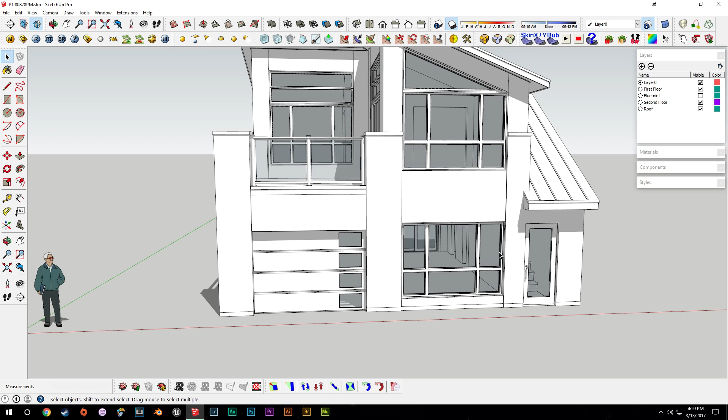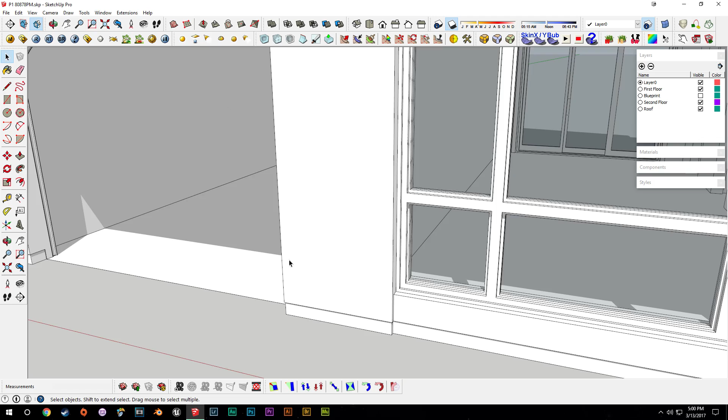But before we do that, we're going to try and add a little bit of thickness to the floor. If we just hide the garage door here, it doesn't really make a whole lot of sense for it to be paper thin essentially, especially for sort of a concrete lip. There's usually some sort of height going on in the garage concrete slab, and even into the floor area a little bit into the main room.

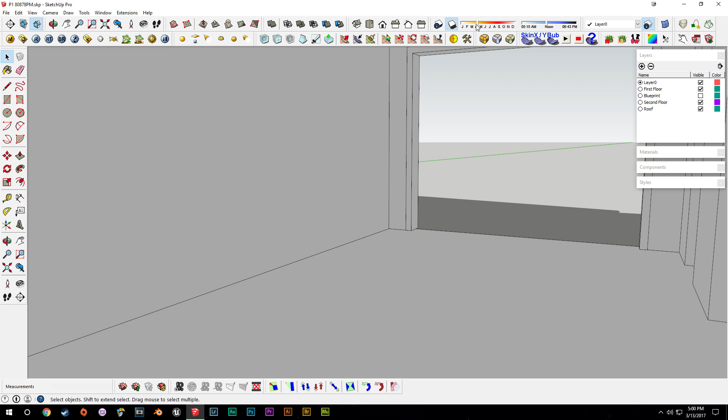So we'll actually pull down the house probably a quarter inch or a half of an inch, rather than pulling everything up and then having to change the heights of things. So we'll just go in and do that. We'll start by hiding some of these doors, and turn off shadows just to increase the performance a little bit.

We'll go into the first floor component and then just control-pull down, say maybe even just 0.25. It doesn't need to be super thick, and maybe a little bit more than that. Let's say 0.5. And then just reverse the faces there.

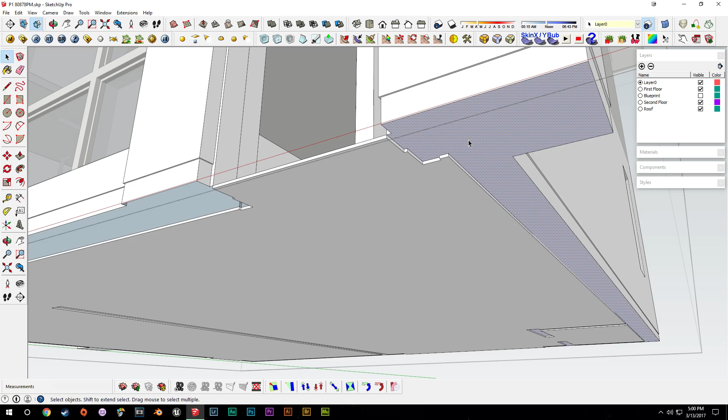And then we can go into these elements and pull them down to meet. And if it doesn't have a line across it, we can just draw one in, reverse that face, pull it down to meet the floor. All right, I think that's all the elements, and so now we have some sort of thickness to our floor.

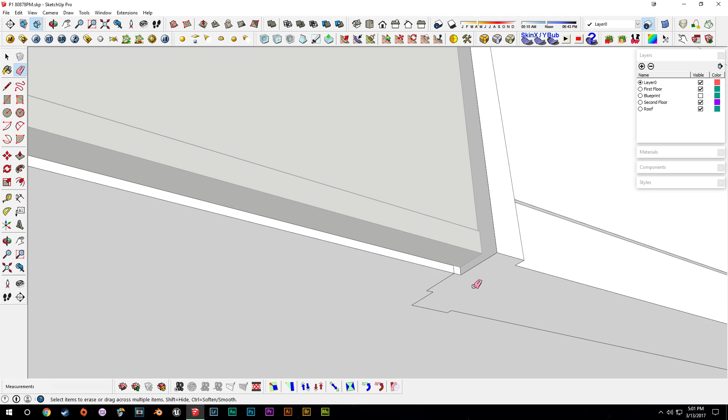And we'll just go and clean this up a little bit, pull those down. And then specifically for, suppose the underside of the door, we'll just pull this out to meet the front of the door. Maybe even a little bit further, say 0.5 of an inch.

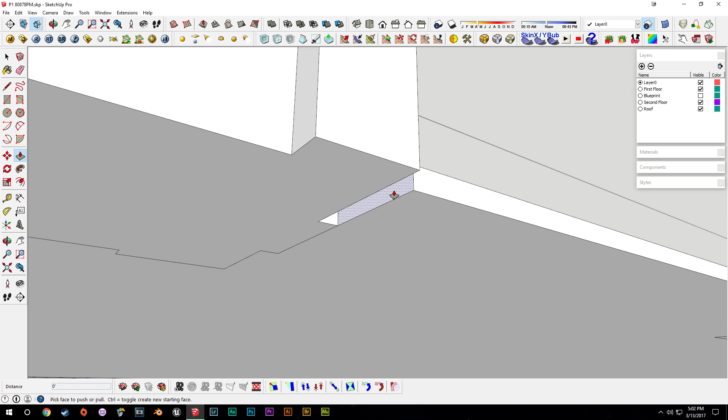And then pull this around there. And then we'll pull this piece around the back of the door, sort of a mini frame, door stop. And then we can go and unhide the rest of our doors - edit, unhide all. And just check how the floor meets up with those.

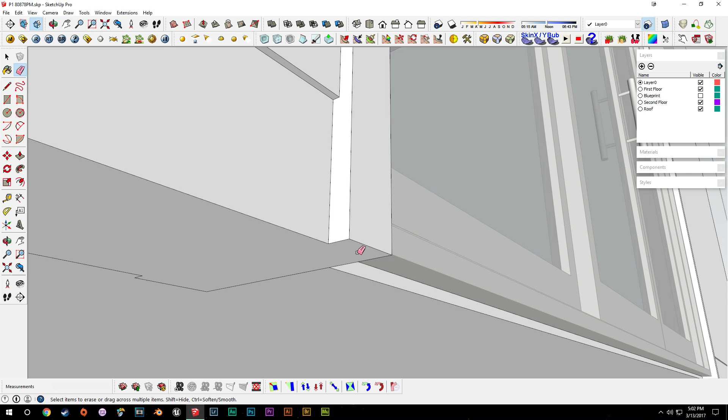There's, I don't know what this is, but we'll just pull this down and erase that line. And then pull this out to the front of the door, say another 0.5. And we'll draw a line across here so that our interior floor, when we do add a texture to it, doesn't extend out past the house.

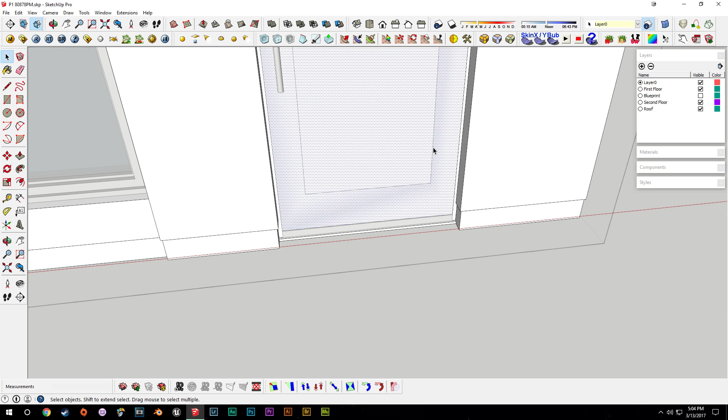This can be sort of maybe a concrete lip or metal or something like that. We'll pull this out 0.5. And then we'll do the same as the back of the house, and draw a line across so our interior floor doesn't extend out. And we'll just erase any faces that appear.

I think we'll pull this out an inch from the garage. I think actually while we're at this, we can just go and add some sort of threshold look to make it look more like a storm door.

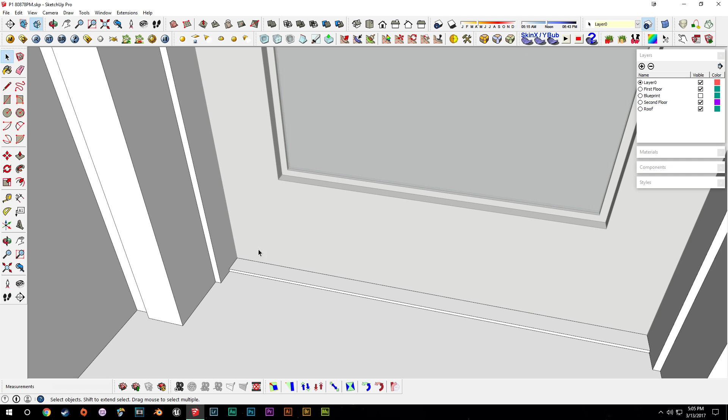Maybe not have an evident seam where it matches the floor or anything like that. And we'll probably, if we just go into the door as well, add a metal strip on the back as well. And if we just look at the front here.

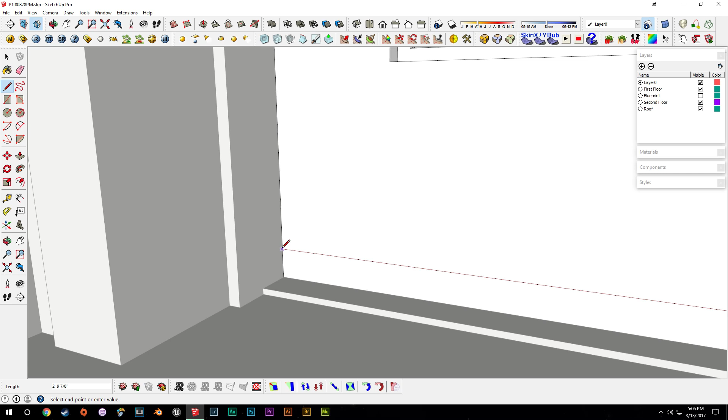You just draw a seam through the door here until it matches there. And then we can draw a line there, right here and across. And then I think this came out about 1/8 of an inch, so we'll do the same.

Pull this little strip across to there. All right, and then we can just pull this strip back in a little bit to meet up with the metal strip on the door. And so I guess that'll do that for the floor.

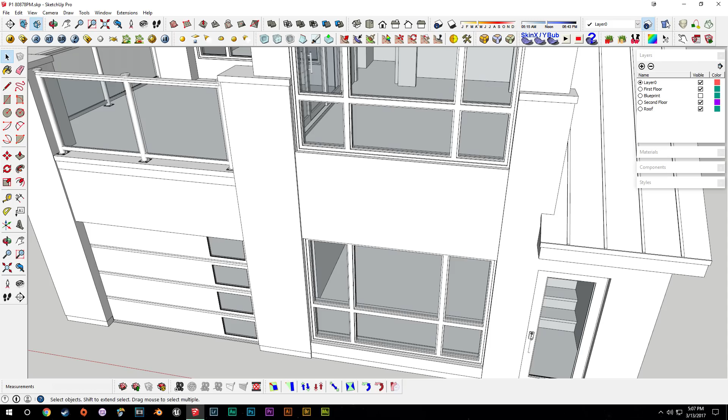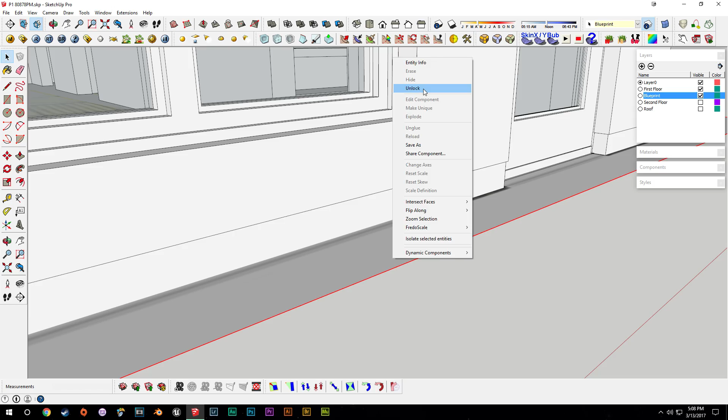So now let's move on to the interior. We'll turn off the second floor and the roof, down here to the first floor. And if we just turn on blueprints - I guess we can hide this blueprint. We'll probably need to move the first floor blueprint up a little bit just so we can see it. Say unlock, and then move this up an inch.

And so now we can see our kitchen. So we have sort of a bar island, our fridge, stove, a couple of counter modules, and I guess a pantry. Maybe we'll have this be forward facing, maybe side facing, I'm not sure.

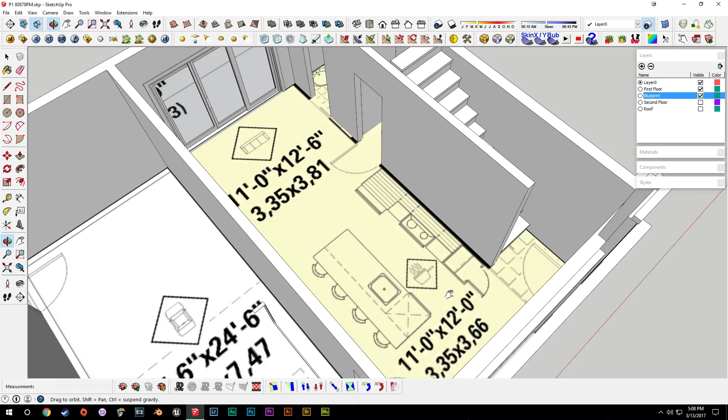But I think this will be our general focus for this part. So we will move the blueprint back down again. Actually, we'll go into the first floor and delete the top of our floor. We still have the bottom, but at least this will allow us to see the blueprint without it clipping through the face that was there.

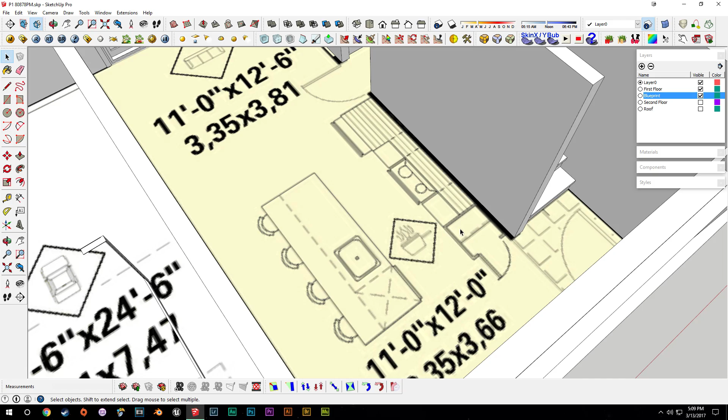We don't want to change the height of the blueprint for drawing, because then we'll be drawing between the blueprint layer and the floor layer, and it'll cause a lot of confusion later on. So we'll just delete the face for now, and add it back in later.

So for the time being, I think we'll draw all of these components outside of the first floor element, and then we can sort of pair them with that layer later on.

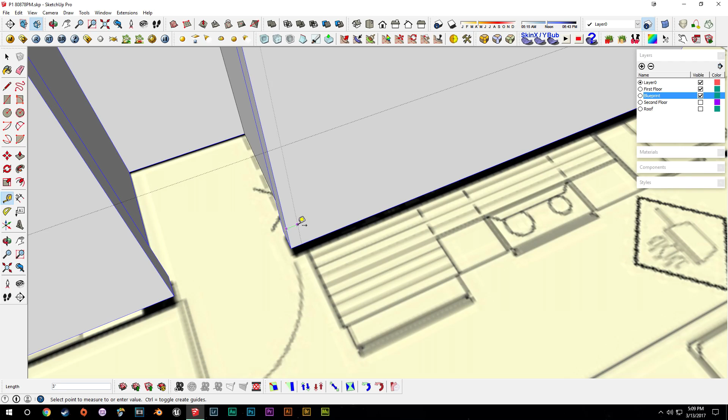But we'll go in and draw our counter heights, and that will be 36 inches as standard. And then figure out our other dimensions, and we'll put that about there. We're not going to be super precise about these particular measurements, we're just going to try to get it to match the blueprints as much as possible.

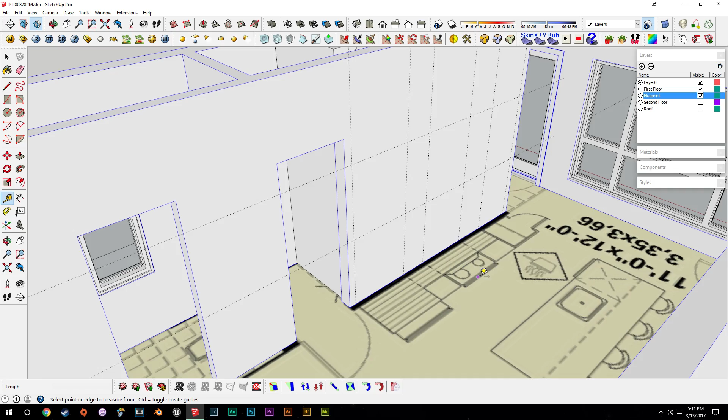And then we'll say 72 inches for height at the moment. Now this will be for the box that the fridge will go in. Fridges are usually between 67 and 70 inches, just so we know that that fits in there for sure.

And we'll just increase our field of view here to say 45 degrees, just to give us a little bit more freedom of movement inside the interior space.

And then we'll add in the standard sort of counter between the bottom of the cabinets and the counter dimension or distance. This is 18 inches.

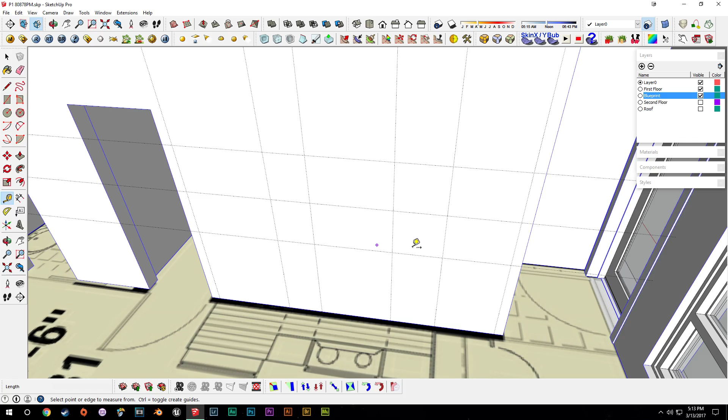So we have that. And then for our middle cabinet here, which will be our stovetop and oven, the range hood height is usually between 30 and 36 inches. So we can just say 32, and that'll put us there.

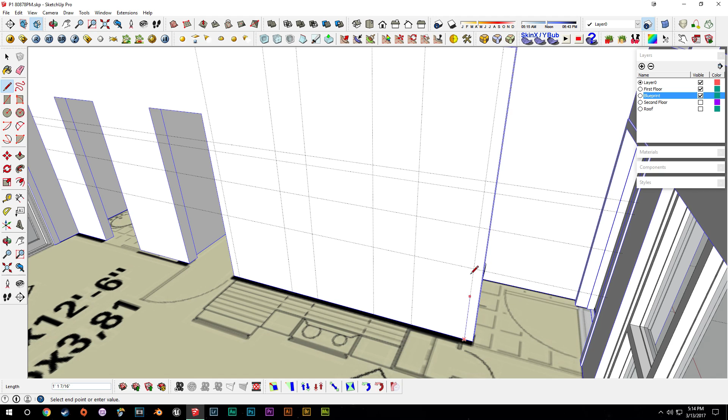And I think we'll have our cabinetry go to the ceiling. We'll just draw our line in there. And then we'll basically just draw a box here so we can fill this in, so it'll be the fridge top, and then bring it down here for our counter.

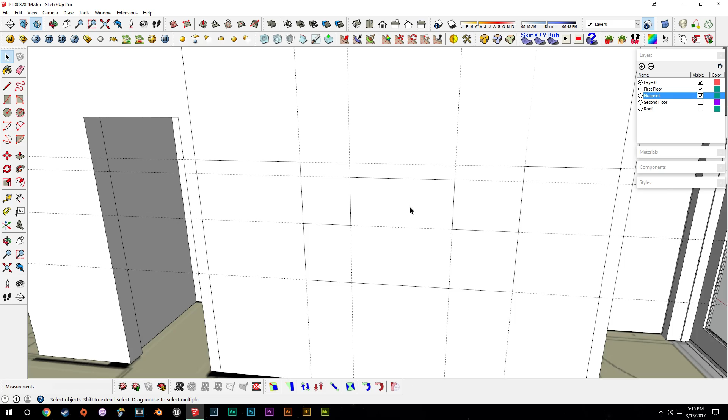And then this will sort of be our pantry area, so we can erase this line. And this will be our cabinets and sort of range hood area. And I'm wondering, maybe we won't do the pantry cabinet. I think what we'll do is just erase these lines so that we can have one continuous line.

We'll just extend the counters all the way to the end. And I guess we'll bring down a sort of molding to run along the top of the cabinets, and then sort of a spacer.

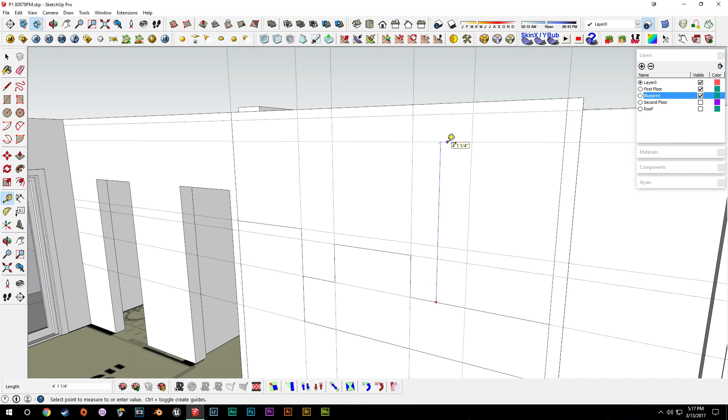So if we just pull this up, I mean, we don't need super tall cabinets, probably maybe 4 feet. And we might shift the cabinets around a tiny bit, just so we can sort of have 3 equal parts, and then drag it out to the end.

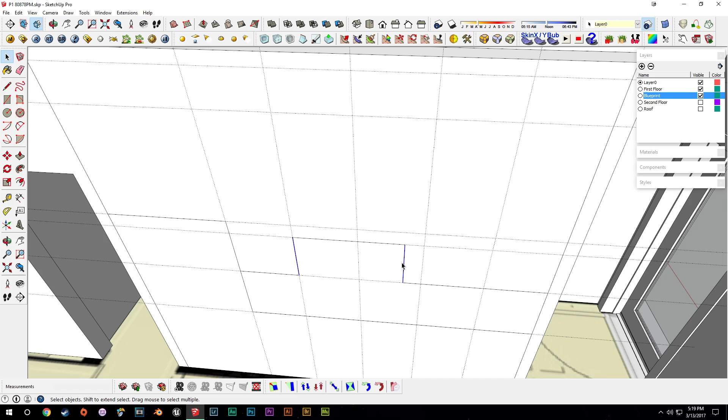And now we can see where we'll have 2 cabinets there, and then we can shift these 2 lines basically to here, so they will fill up where these 2 doors would be, and then we can have sort of 3 equally sized doors on either side of that.

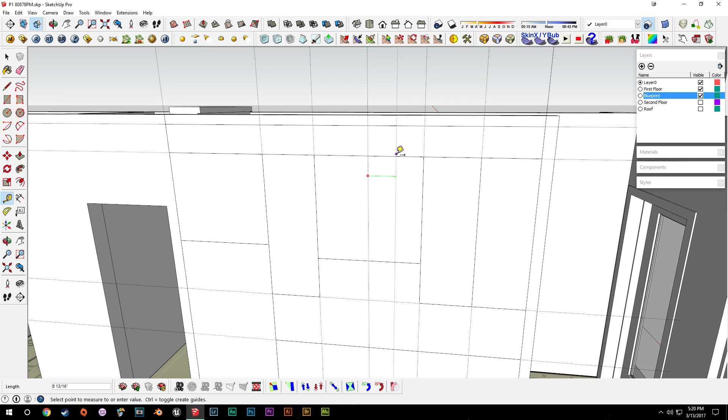And so this open space here will be where the range hood goes, and this will be obviously the bottom of it, but it's not going to fill out this entire space. It'll probably fill out maybe half of this. We'll probably make it about, we'll just see what 8 inches either side looks like. And I think that looks pretty good.

Drag this up 5 inches, say, and maybe a few inches either side as well, maybe 4 inches. And we'll just box those in. And we can probably start erasing our guides now because it's getting a little bit confusing to see.

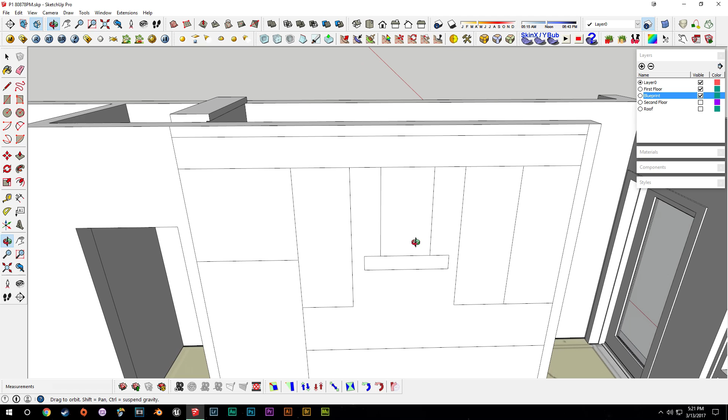And so now we can pull these out to about here. We'll say 28 inches deep. These actually look a little bit narrower than that, so we'll say 26 inches. And then the fridge depth is usually between, I think it's 36 inches. That's 26. We can add, say, another 5 to that.

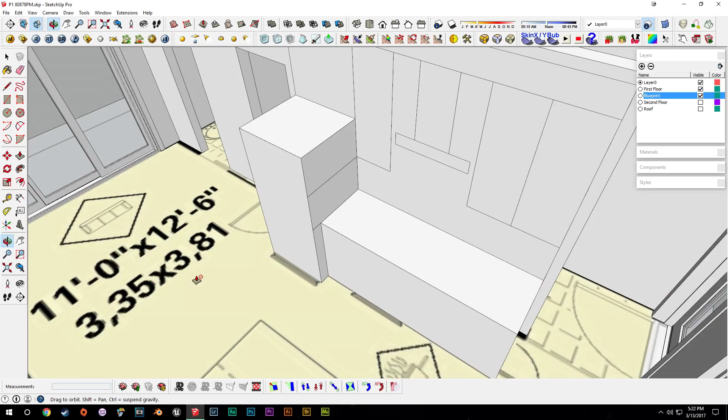Maybe one less. Erase these lines. And the cabinet depth above the fridge will meet that. I can erase that line for now, though. And if we just look at the cabinet depth, we can pull it to about there. It says 1'8". And I don't think we want them really that deep, so maybe pull it in another 2 inches.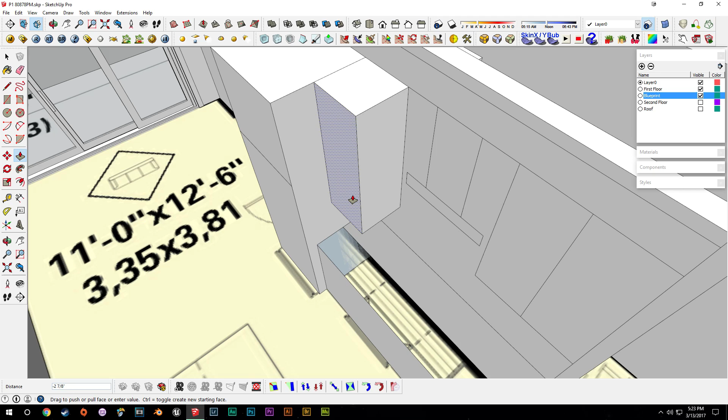And obviously we're modifying a lot here, and that's fine. We don't need to follow the blueprint exactly, and it's also not a particularly precise blueprint. It's just something for us to play with, and you can modify it any way you want. If you want to completely change the kitchen or even have it somewhere else in the house, that's perfectly fine as well. But this is what we're going to do for this one.

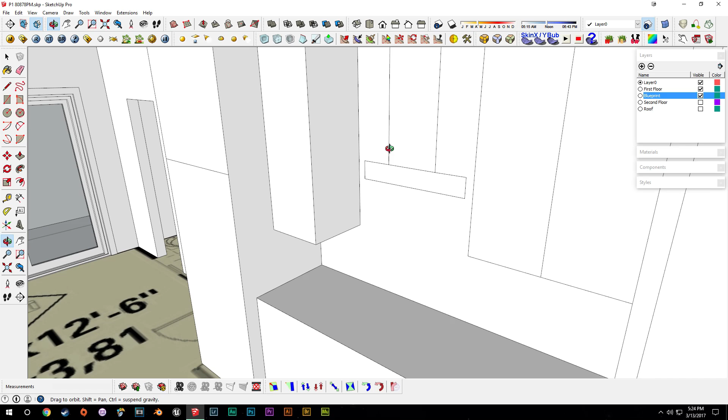So we can pull this box out now, and this will meet sort of the front there. Pull both of these out now as well. And so we're just sort of roughly framing up how the kitchen unit would look. And then we can start adding in the details later.

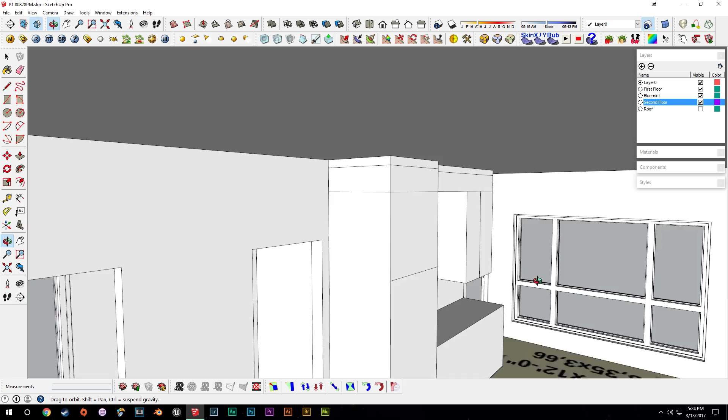We'll pull this out to match that. And we'll just toggle the second floor there for a second so we can see that it matches up properly with the ceiling. And now this, the sort of the range hood middle piece, we'll pull that out, say maybe 2 inches back, and then pull this main piece out to the front of the counter there.

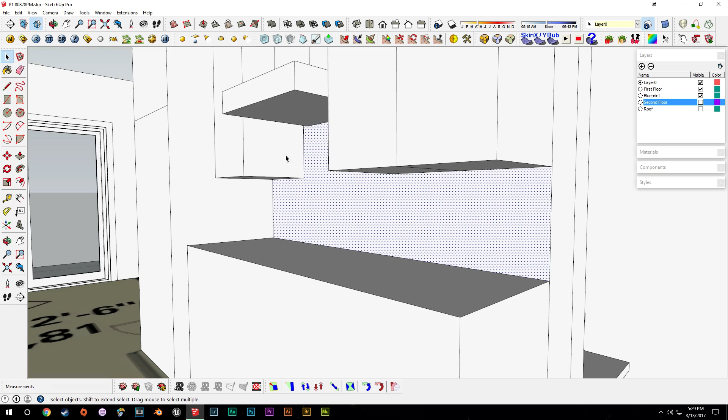And maybe drag it back in a little bit, 2 inches there. And then we have this back section. Now we're not going to delete that line because this will be, I guess, some sort of tiling. And so we can pull this in 0.5 inches as well. And even sort of put maybe a little metal strip along the inside.

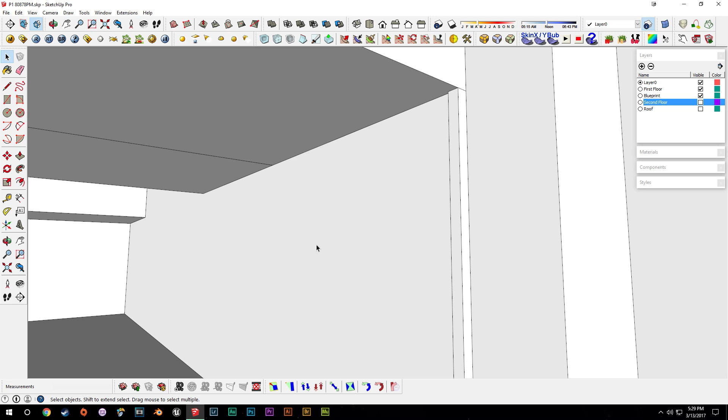And I can push that in, say, 1/8 of an inch. Now we can look at our counter. And we can probably drag this down, say, 1.5, just to see what that looks like. I think that looks pretty good.

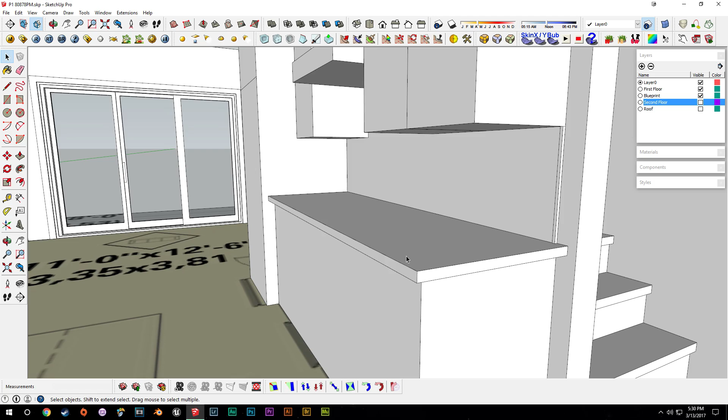Leave it there. And pull this line in. We'll drag it out 2 inches, both sides. And maybe a little bit less. See what an inch looks like. I think that looks okay.

We can obviously change this later as well. Maybe a little bit more, 0.5. Maybe drag this down 1 inch. And at this stage, a lot of it is fine-tuning, just making sure you get things that look right and don't stand out too evidently. And a lot of that's up to you, whatever you feel looks right.

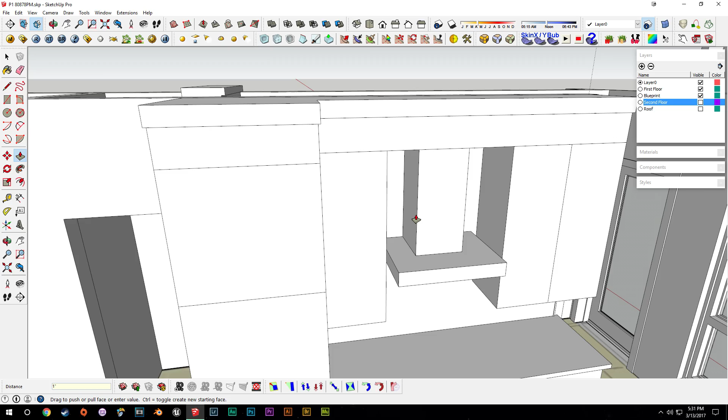And now we can get into doing a little bit more of the finer details now that we sort of have the base structure completed. So we know where the oven's going and the fridge and all of that, so we can get into doing some more of those details.

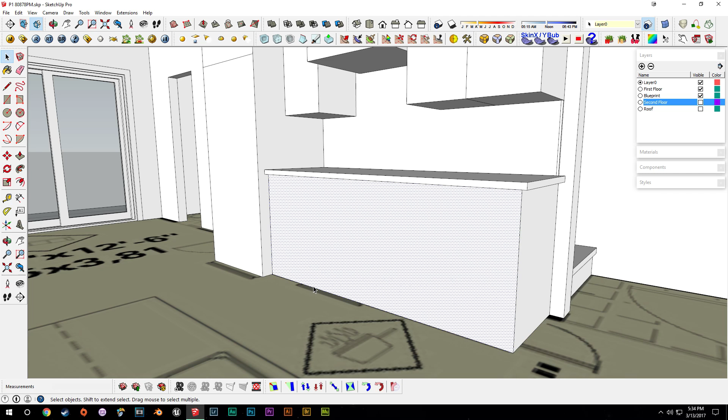And we'll start with the base here. And so we'll add sort of a kickboard, maybe sort of a 4-inch, say 4 inches. And we'll drag the end in here 1 inch. Maybe this end as well. But the kickboard will be excluded from that height. I'll drag that down. Drag this in 2 inches, we'll say.

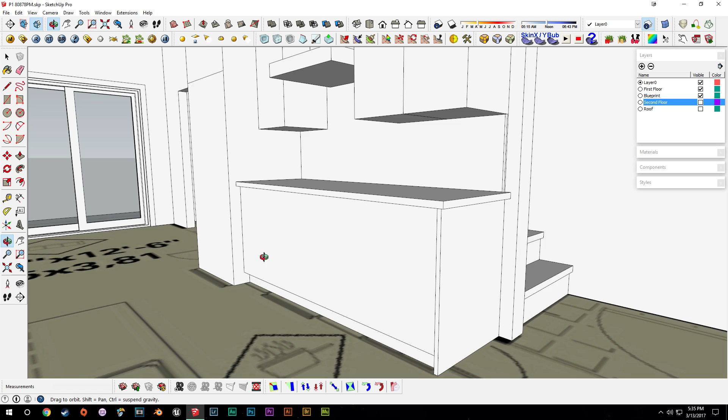And so now we're going to try and split this evenly with the top here. And so we'll break this bottom up into 5 equal parts as well. I'll grab all of these and scale them out to the end. Now we can toss our lines in.

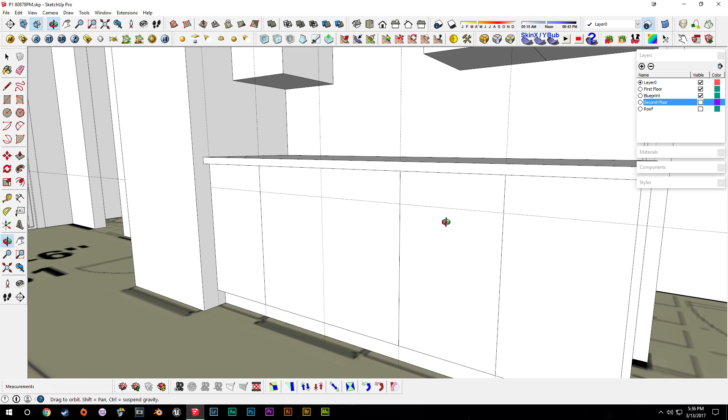And then we'll also add in sort of a drawer layer. I'll make that 6 inches deep. Try 5.5. And so this will stretch across all of these.

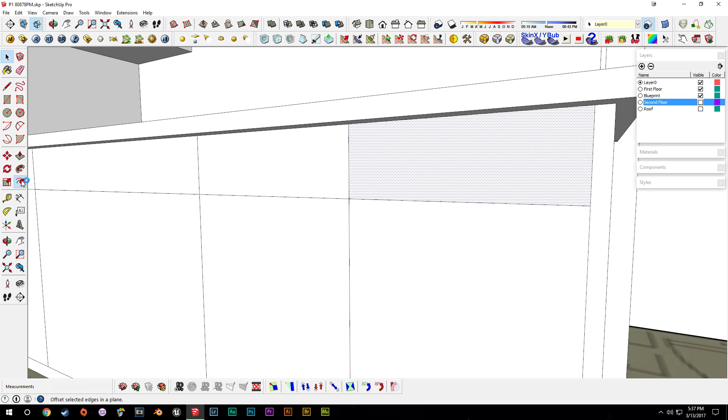Sort of excluding this one. Not entirely sure yet how we're going to do the oven, if we're going to implement that into the counter, and we may do that as well. We might have some sort of stovetop element, and then we can include the oven underneath here. And then we can go into our offset tool and offset this 1/16 of an inch.

That way, when we do this on all of the drawers and cabinets, we'll have an 1/8 inch gap, which would be a little bit more reasonable, I think. And the same as the push-pull tool, if you have the face selected and you double-click the edge line, it will pull it in the same measurement that you had previously selected, so it'll save you a little bit of time.

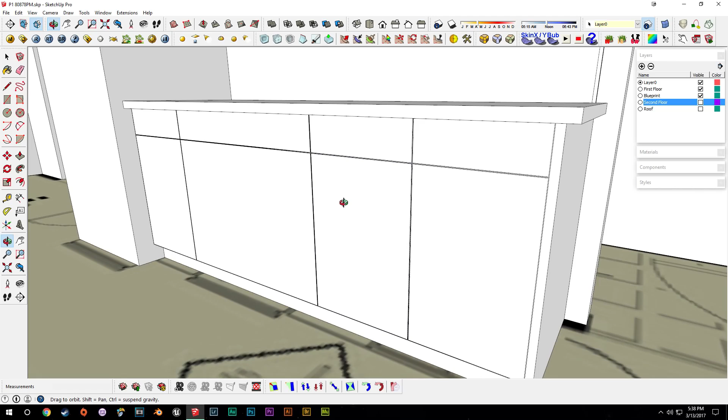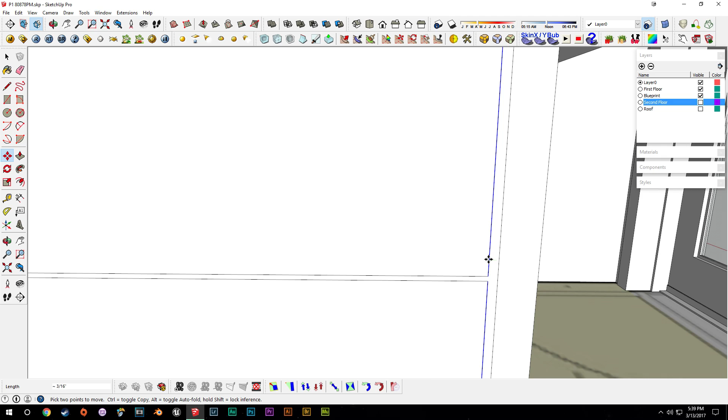Now we can go in and erase all of these in-between lines, except for the bottoms, where we will grab these again and pull them down to the bottom, excluding them from that gap. And because this was only done on one side, we'll grab both of these lines and pull them in another 1/16 of an inch, and the tops.

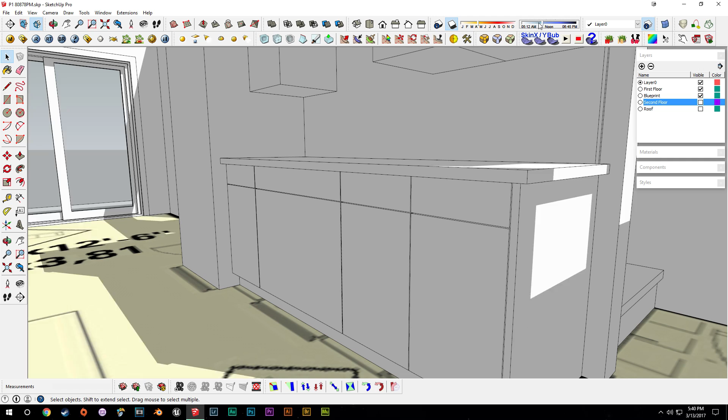So now we can grab this in-between face and pull it in, say 1 inch. That'll help create the faces of the cabinets and drawers. We'll just turn back on shadows. We're not going to get a whole lot because we do have elements of a wall around us, but you can sort of get the idea. Turn shadows back off again.

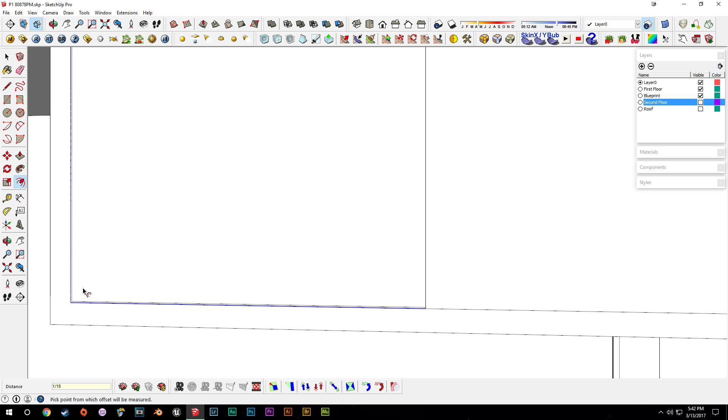We'll go around and do the same thing with our cabinets, just pull in a 1 inch gap on the side and the bottoms. We can erase our guides. I'll just grab these two faces and pull it in 1/8 of an inch. Same with these two lines.

Just double click there. Then we can drag our guide in, say 1/16 from the center. And we can grab this middle piece again and pull that in another inch.

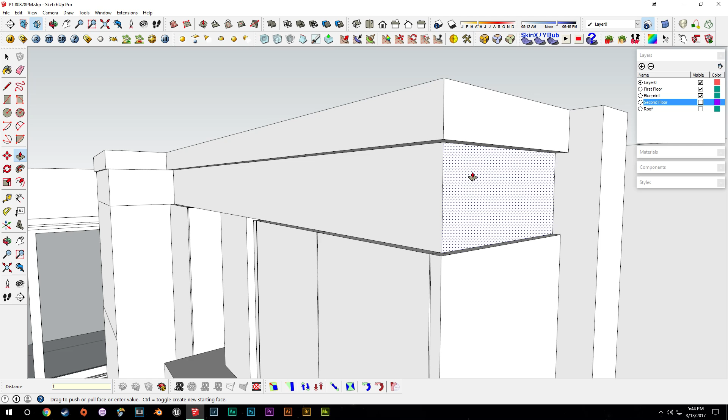If you want to go ahead and add the interiors of these cabinets to your model, you can do that as well. Normally I probably would, especially if this was a client job or something like that. But in this case, just trying to get through a lot of the material fairly quickly, we're just going to do the faces of the cabinets.

We'll push all of this in an inch, just to expose the tops of the cabinets a little bit. And I think what we'll do is pull out the tops of this again, to sort of make it look a bit more like it's blending in.

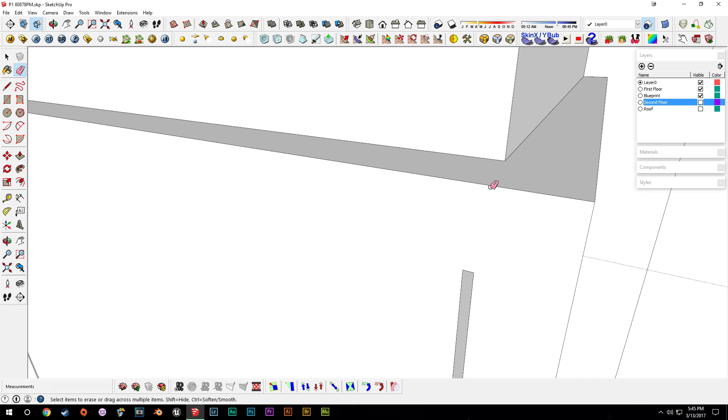We'll have to add in the tops of the doors, so we'll draw that across. I'll pull this in an inch either side and drag a rectangle around here. Then we can pull this in basically to the wall. Erase the bottom - this is where the fridge will go.

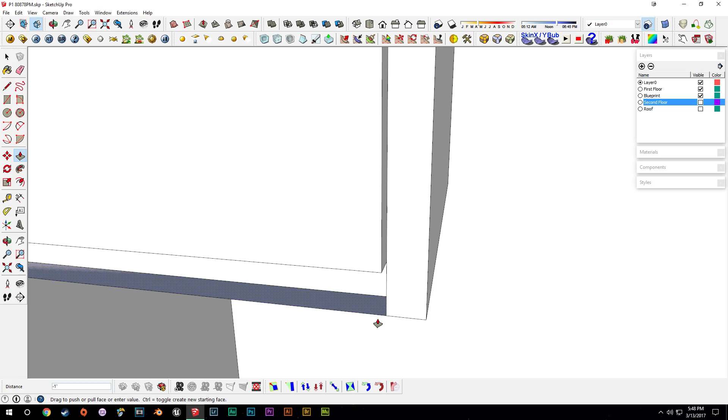Maybe what we'll do, let's just try and see what this looks like. We'll pull this down to the bottom and then pull this down there as well. Sort of undoing a little bit of the work that we just did, but just to see what it looks like anyway. And rather than boxing them in, I think this looks pretty good. Maybe we'll leave it like that - I think that looks pretty cool.

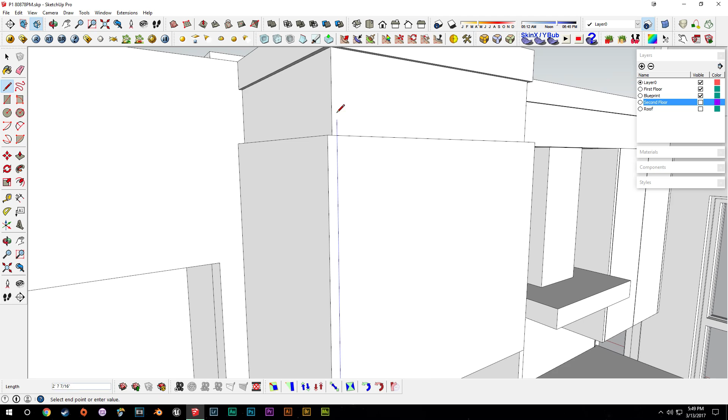So just for uniformity, we'll pull these lines up as well, and we'll put 2 doors above the fridge. So we'll just drag a line to the center, and then essentially pull out a line from the center, a 1/16 of an inch either way. We'll try and draw a rectangle around this to there.

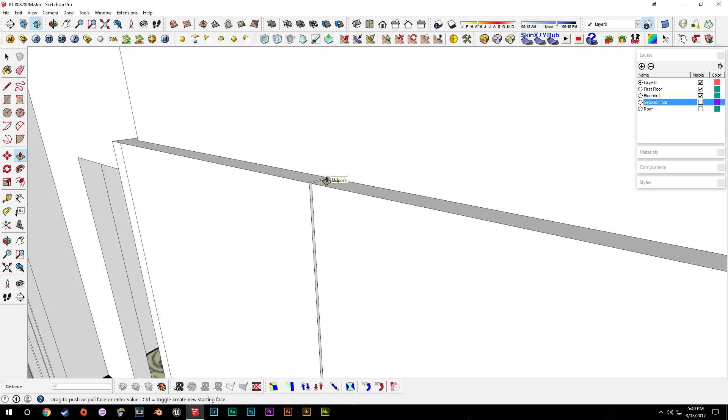Erase those guides. I can pull this in an inch - that already is, so 1 inch. And then pull these edges in an 1/8 of an inch. We'll have to go in and draw the bottoms. Not that it really matters, but we will texture them differently later on, so we will draw those in.

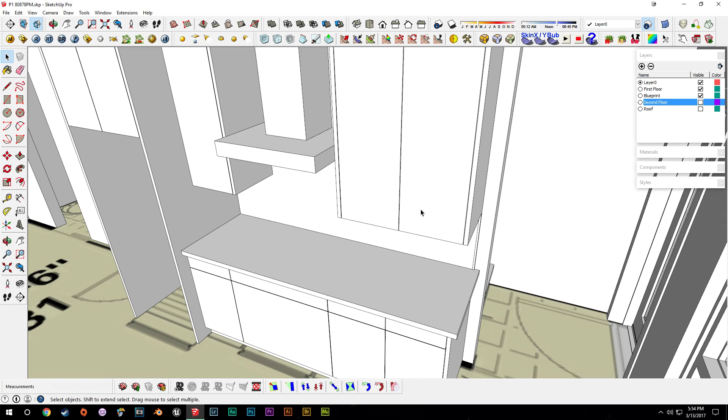And so I think for the cabinets themselves, we'll do a sort of circular knob. And if we'll just go to this wall here, as it's part of a component, we can draw on it - say 40 faces.

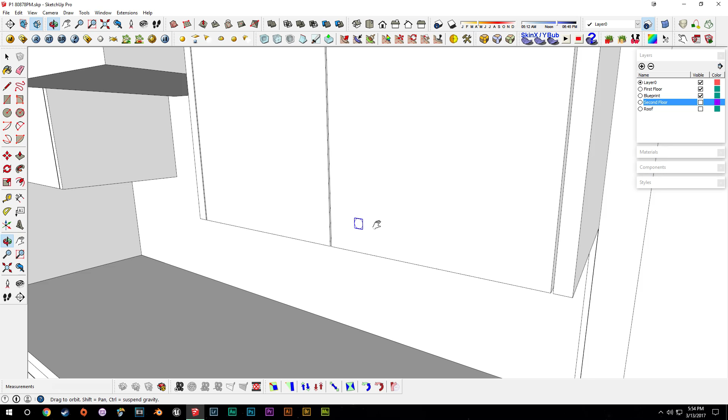Just drag this out 3/8 of an inch. Just say G, and we'll say cabinet knob. We can move that to about here, and get a rough idea of the scale, move that out to there. These will just be simple. We can move this out and scale this face up. It's about that size, and if we measure that, it's about 1.5 inches across.

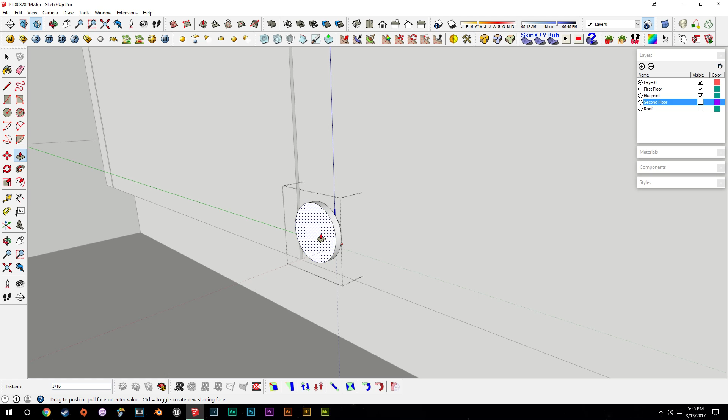We can pull this out again, say that far, and have a gander at the distance — it's about 3/16 of an inch. We'll make it a little further. Pull this out, say to there, pull this face back to there again. Now we can just pull this in, we'll say 1.5. That's roughly right.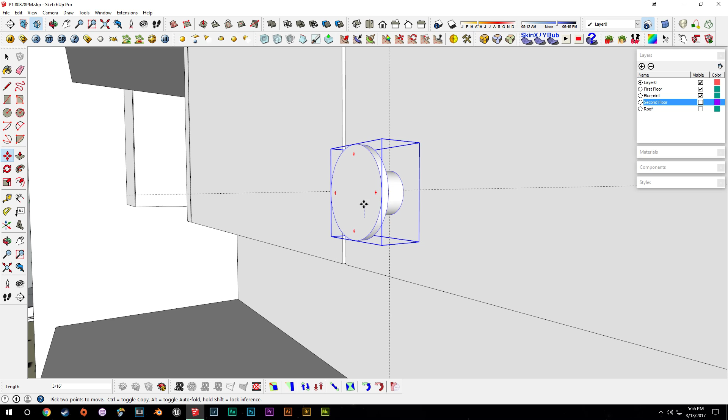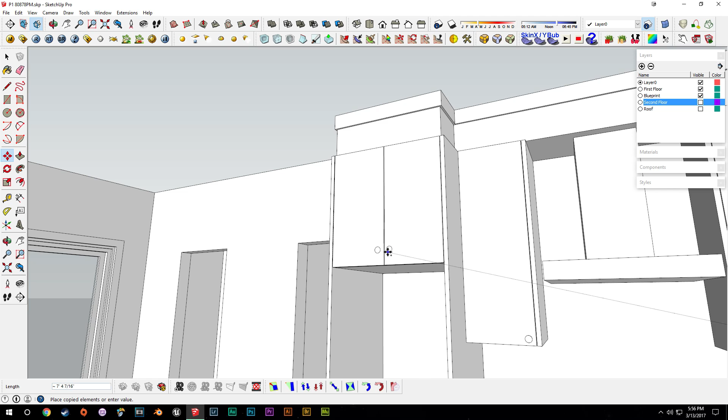Roughly right. We'll drag this over on this dimension to about there, so now grab this one and drag it over to here. Drag this in 1.5, get it close to where it needs to be, about right there. Now we can grab both of these and drag them up to here, and pull them out to make sure they're the right distance — 1.5. We only need to do it on one side because once it's lined up with one, it should be lined up with the other.

Maybe we'll pull them up a little bit higher from the bottom, say another inch or so. I think that looks a little bit better.

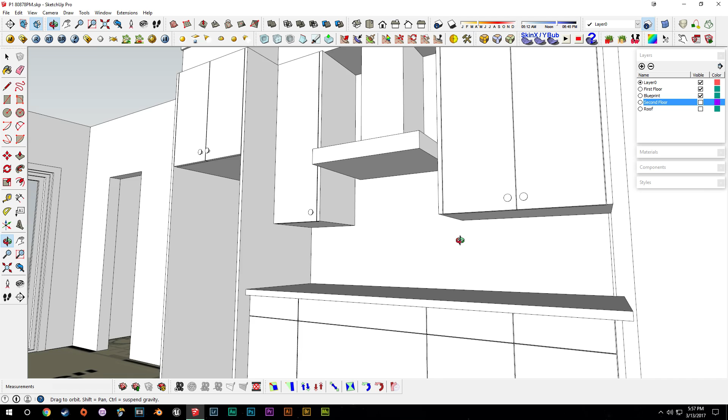So now we can take these 3, drag them down to these cabinets, and we'll do similar dimensions. That should now be 2.5 from the top. Now we can work on the drawer handles, and we'll make these about similar dimensions.

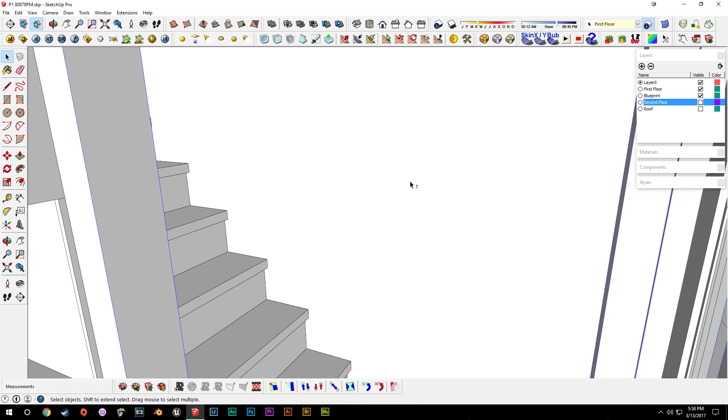This is about 4, we'll say 5 inches. So we'll just go over to this wall as it's part of the component, and we'll say 1 by 5 inches. We'll triple click this and say cabinet handle, and we'll find the center point, and we'll skip this middle piece because that's where the oven will be going, so obviously we won't have a drawer there.

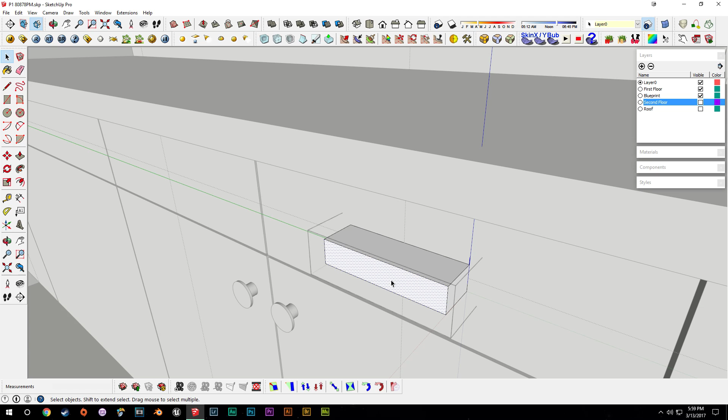And pull this out — this is about 1.5 inches. Maybe pull it in another 1/4, and we'll go with 5/16 the way around. Drag another box in there and then pull this box down to there, and that'll give us sort of a squared off handle.

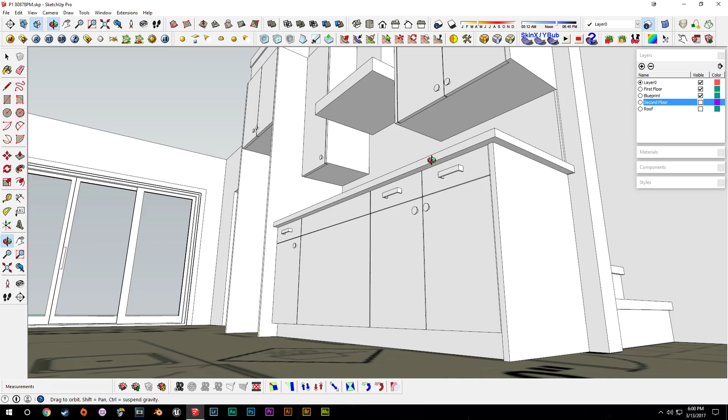We can erase our guides now. I think we'll make these a little bit thinner actually, so we'll say 1/8 of an inch on the bottom, 1/8 of an inch on the top. We'll drag this front out.

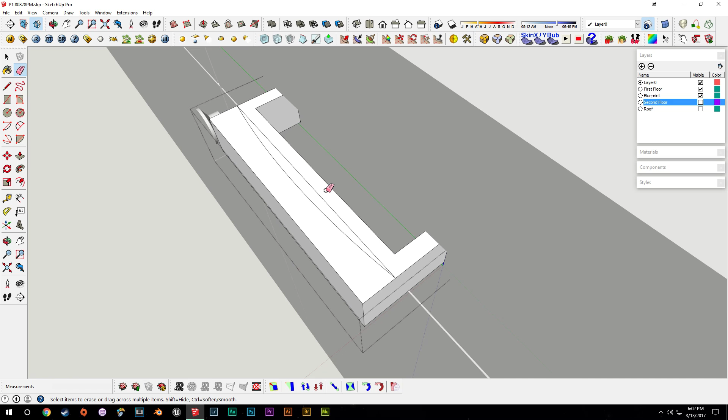So we'll draw a line about here, and then we can take our arc tool and bring it out, say about there. Then we can offset this inward to about here, and then just connect these lines together. I'll drag this down to erase that bit, erase all these extra little pieces. Then we can push this down and erase that front, so now we have sort of a subtle arch on the front here.

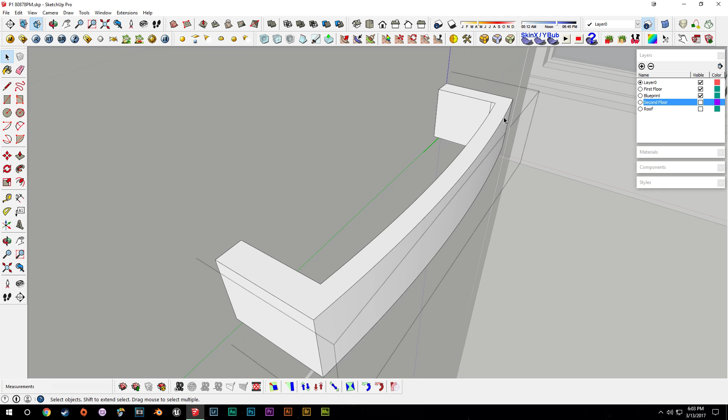And even with these knobs, I think what we'll do is go in and pull them out a 1/16 of an inch. When we do rendering later and put a reflective surface on these, it will help give them a softer edge around the sides there. I think that'll help make them look even just a little bit better.

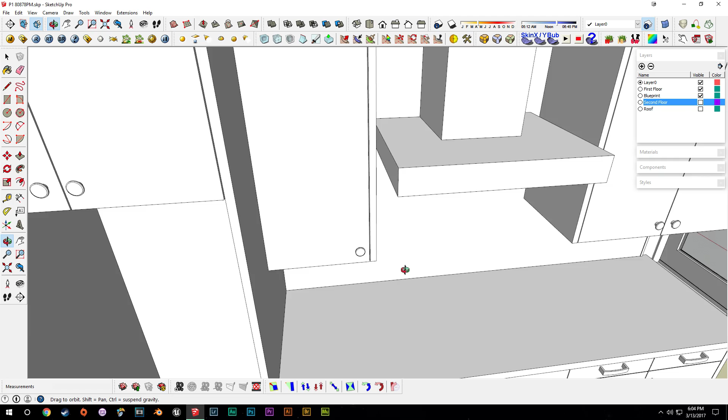And we'll increase our field of view a bit more to what will probably be more realistic, say 75 now, so we can have a look at what we got made here. And even turn shadows on, see if we can get the sun to come in across these. Yeah, there we go.

I think this is a step in the right direction. Obviously it's not complete yet — we've got to put a bit more detail into the range hood, put the oven in, figure out what we're doing with that, and put the refrigerator in. But all the same, I think this is looking pretty good.